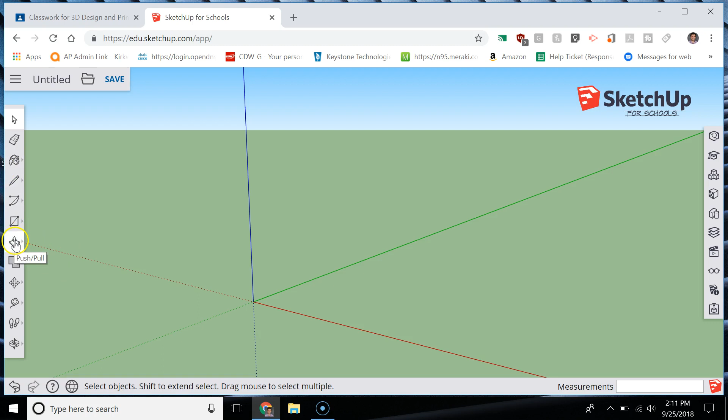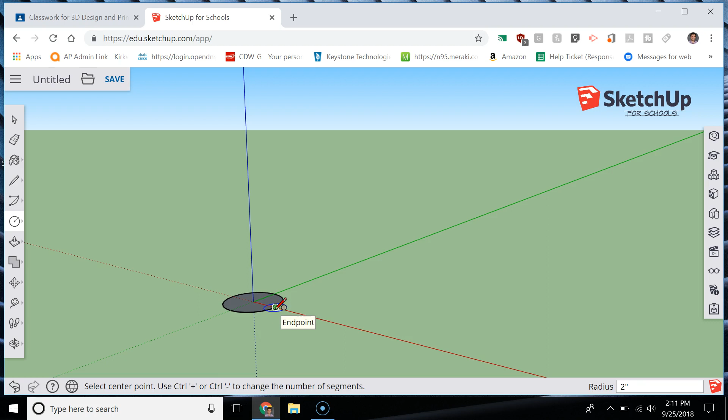Okay, let's make our nose cone. For the nose cone I'm going to make, I'm going to need a circle tool. I'm going to select my circle tool. Nope, not my circle tool. There we go. I only want my rocket to be a couple inches, so I'm going to stick with that 2 inch. But remember it's in radius, so 1 inch, like that. We'll zoom extents, and now you can see that I have the base of my nose cone.

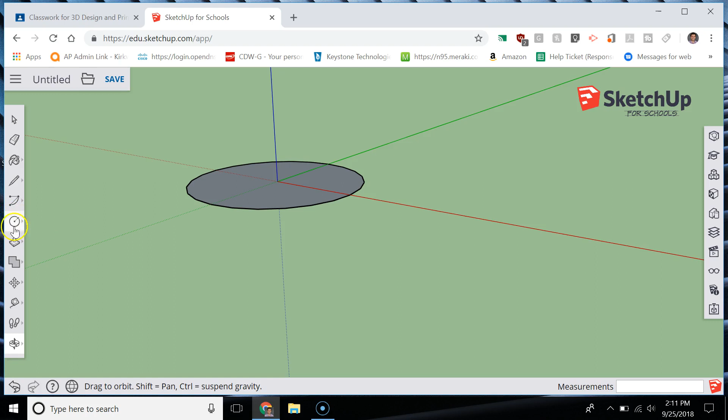To create the actual cone shape, there are a few ways we can do this. We can make a very strict cone that's very sharp pointed, or we can try and make it a little more aerodynamic using our arc tool, and that's what I'm going with. So I need to first change how I'm looking at this. I'm going to start with my pencil tool, clicking on that red line, into the center or the origin point, because I need to create a section here. Then I click from there, and I want my rocket to be a little bit taller, so I'm going to set this line to 3 inches.

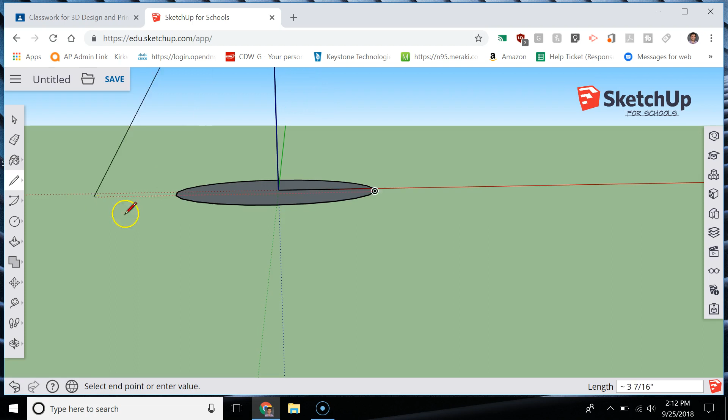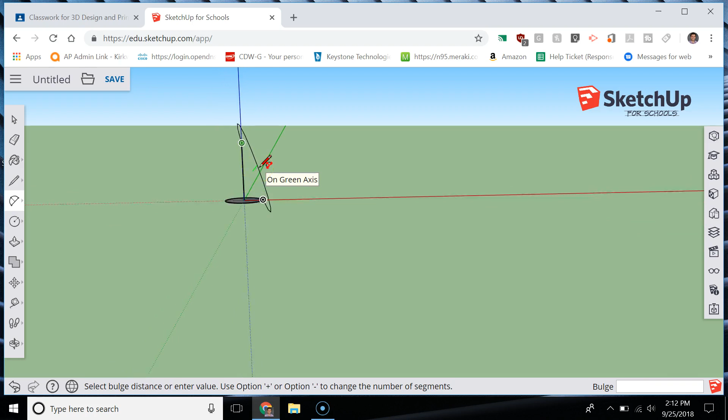Now I'm going to zoom out so we can see it. And then I'm going to take this 2-point arc tool. I'm going to click point A, point B. I want to make sure that I'm getting it on that red line. I might have to zoom in a little bit. I'm going to create my 2-point arc like that. Now you can see mine didn't connect, because it looks like I didn't connect it at the bottom there. I can go Control Z to undo it.

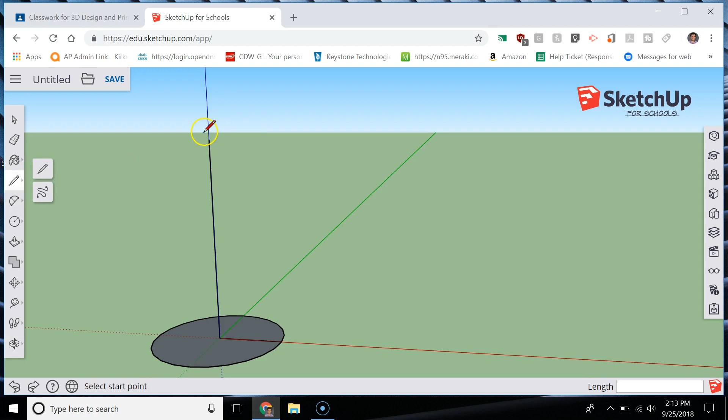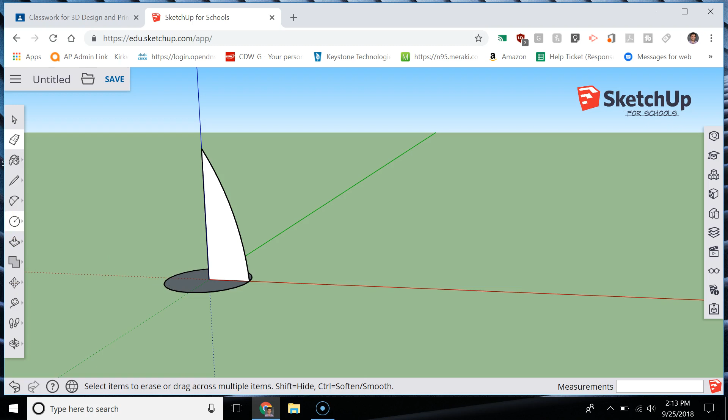And I'm going to make this slightly easier on myself so I know where I'm going. So I just made a line, so I made a triangle. Now I'm going to make this 2-point arc here, like that, and I'm going to delete the center portion here. So now I have a nice airfoil design that my printer is going to be able to easily create for me. Now I'm going to rotate around so I can see both in front and behind that little triangle I made there.

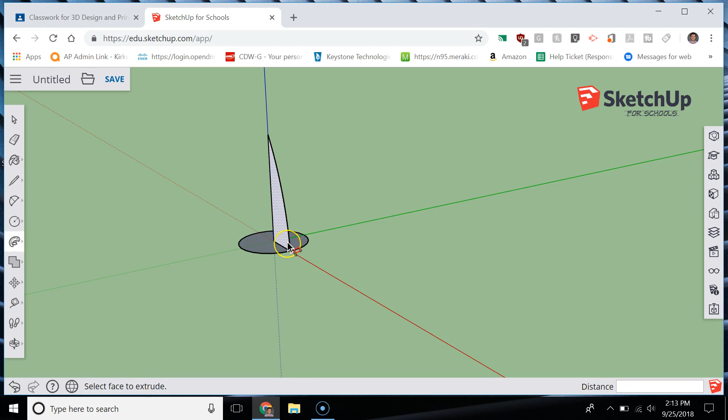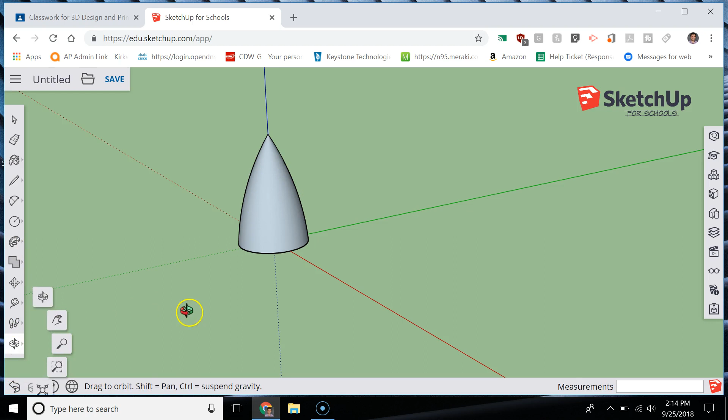And I am going to switch, oh, right here. Under push-pull, I'm going to use that follow me tool. When I grab the follow me tool, I click the side I want. You might have to play around with it, but the idea is to trace that line. It comes back here, and now I have this really nice nose cone created. But if I go underneath, I'm going to see that the bottom is hollow. Simple fix: take the line tool, point A, point B, covers it, and let's delete that line. Now we have a nice nose cone made.

Play around with your nose cone, choose different shapes and sizes, see what you can come up with, but make sure it doesn't look exactly like mine.